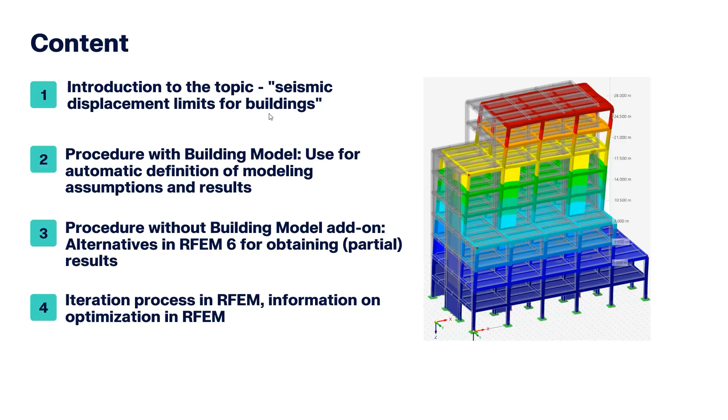Okay, so let's get started with the first topic, the introduction to the topic of seismic displacement limits for buildings. The reference for today will be Eurocode 8, design of structures for earthquake resistance. This reference applies for the whole of Europe, particularly maybe in countries like Germany or small seismicity countries it's not that relevant, but we will make here an exercise or an example in which the seismic displacement is the controlling action or the seismic action.

I just want to remark that I'm going to present here several sections from Eurocode 8, but all the requirements are not exactly what I show here. What I want to say is that this summary can be understood as a good pre-dimensioning tool, or a first iteration procedure, but further requirements and sections have to be complied with according to Eurocode 8. So it is recommended that a full review of the norm should be taken into account. As I say, this is maybe the first steps for these checks.

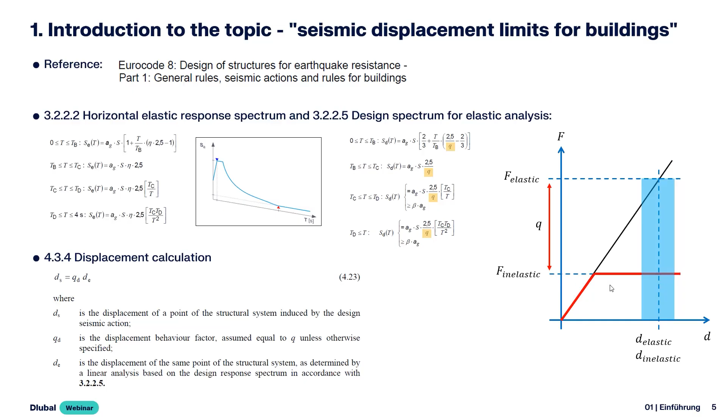Okay, so we have three limits, and the limits are for dimensioning and design of structural elements, but the description or classification of these three limits depends on the description of the non-structural elements. So it's very important to take into account from the beginning, in the prefactibility, prefeasibility, or other early stages of design, it's quite important to define what's the description of the non-structural elements.

So if we have brittle materials, we have a certain limit, and the description of ductile non-structural elements might be really important for the construction site, and maybe the costs of these non-structural elements according to B or C might be too high, and we have to switch to approach A.

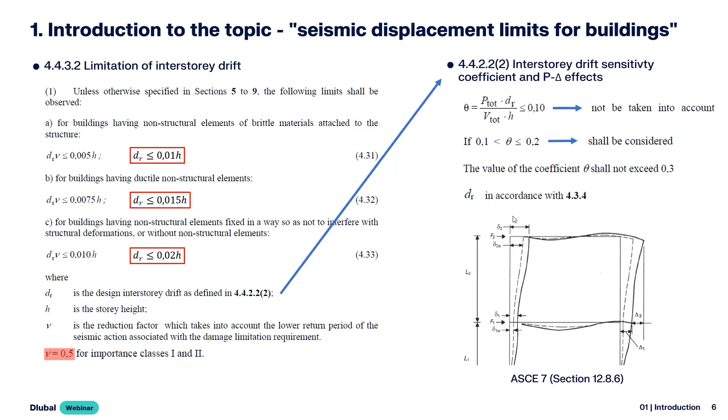So, okay, let's start on the second chapter of today: the procedure with building model. So I have 4 steps and then a couple of sub-steps. I'm gonna once again present here several sections from the norm, and after that I'm gonna jump into the model.

Yeah, so let's check out 2 important sections. The first one, the first step, modal analysis. So based on an available model, we will define a modal analysis, and after that a response spectrum analysis. But for this, we want to take into account the stiffness according to section 4.3.1 and subsection 7.

Yeah, and that's why I started with this figure in the introduction. So this section recommends that the stiffness when the cracking takes place should be taken into account. This cracking takes place in the inelastic response. So if we say at the red line, it's gonna be the actual response of the building. At this point we expect some reduction in stiffness, and the recommended value is half of the corresponding stiffness of the uncracked element, for both shear and flexural stiffness.

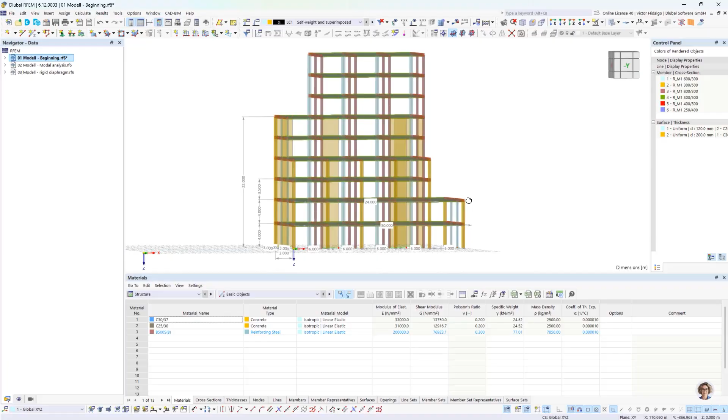No, so this is also very abstract. I'm gonna show a very simple example in the program, and let's take a look at these 2 sections in the program. So I'm gonna start with a description of the building. So we have a very irregular building here. We have jumps in the geometry of the stories, and I did this on purpose to illustrate the concept of irregularities.

Just as a quick description, we have here a reinforced concrete building with walls, and one can say very stiff walls. I'm gonna show them here with visibilities. In the navigator views, we have some predefined visibilities which help us with the inspection of the model or visualization.

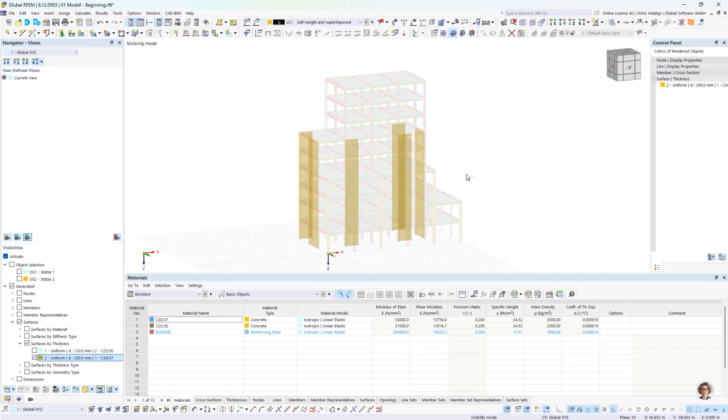So we can see here 6 walls which are conceived to limit the lateral displacement of the structure, so exactly this interstory drift.

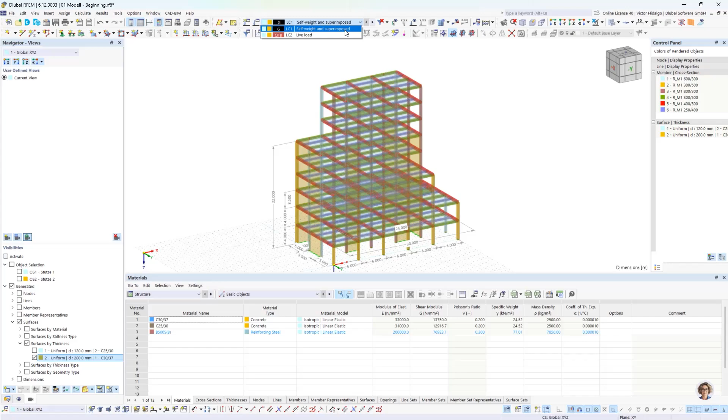Okay, I'm going to cancel the visibility. I come back to the original view, and I am going to show the loads definition. So I have 2 load cases, self-weight and superimposed, and line load. In this case, I have a very general definition, quite simple for today's exercise.

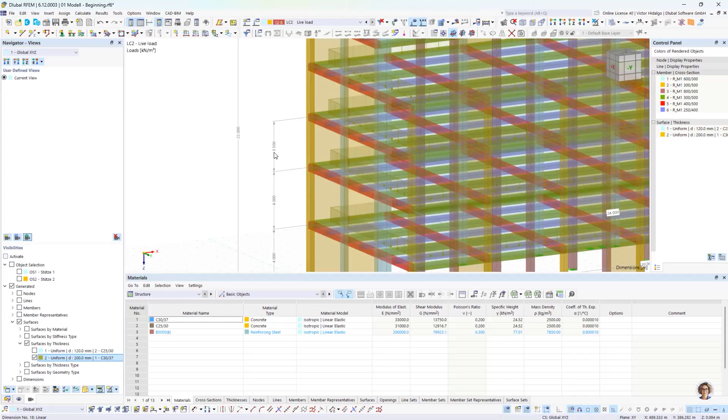Yeah, of course, so that's our base model. Also, just to say, the first 2 stories have a height of 4 meters, and after that we have 3.5. So this is going to be important when activating the building model.

Okay, so we have this general overview, and now we want to define our modal analysis. For this, we will go to the button Edit Model Base Data, and here we can activate the desired type of analysis. In our case today, dynamic analysis. If I click on response spectrum analysis, modal analysis will be automatically activated.

And according to what I want to calculate, I can select other add-ons. In this case, it's just of interest, this dynamic analysis. Take into account that when we activate something here, we might need to provide a norm or a design standard for the corresponding new feature in the program. So in this case, I'm going to leave Eurocode.

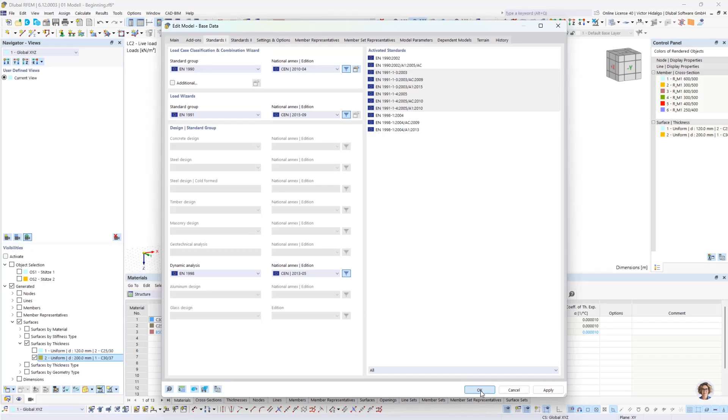Now I can go to edit active load case. In this menu, I can create a new load case of type modal analysis. I'm going to call it modal analysis 1, and this is going to be Basis.

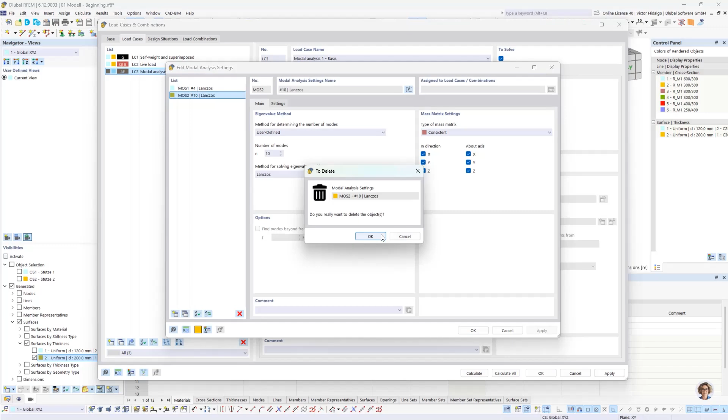I'm going to edit the settings. I erase the second, and I'm going to make here a typical definition for modal analysis to reach effective model mass factors, typical value of 90%. And then we are limited to this method for solving.

On the mass matrix settings, I'm going to choose diagonal on a classical building analysis with the 2 horizontal components and just the Z component, so the torsional component.

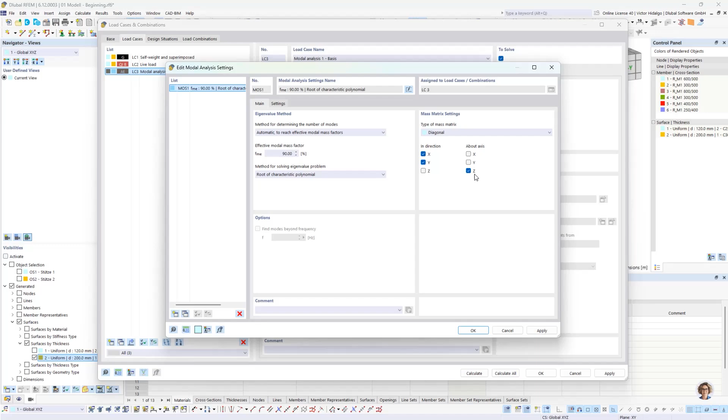Apply, OK. And then we have to select a proper import masses only from load case, load combination. So each code defines the kind of combination of vertical loads that has to be selected here.

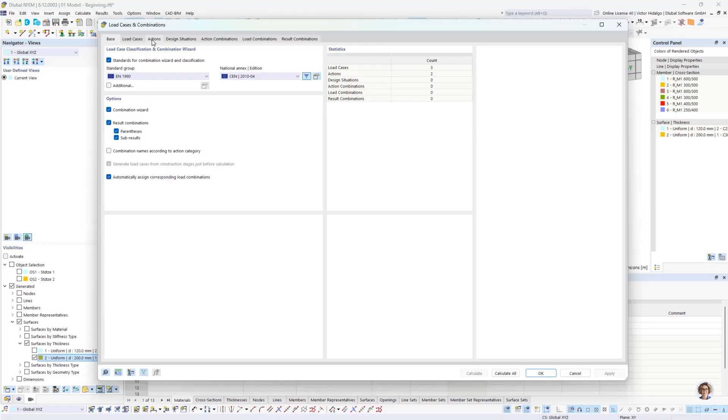I'm going to show how to do this from scratch. So this means here in base, in the tab base, we can activate our combination wizard and assistant. And with this, we can automatically generate combinations according to the norm, the selected norm, in this case, Eurocode.

In design situations is the basic definition, and we select here, for example, seismic mass combination. With this, we will get subsequently here in load combination the corresponding factors and multiplication according to the desired design situation.

Here in assignment, we see a factor of 1 for self-weight and superimposed, and live load with 0.3. So that's according to the norm. So that's quite useful in our program.

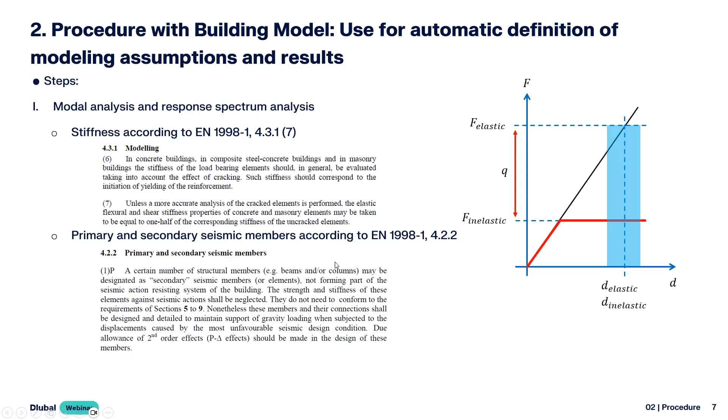So after this, I can define a second modal analysis, and we are going to do the following thing. So this is going to be the basis. In this case, we are not considering any of these two sections. Then we will make a second iteration with just the 4.3.1, and then a third iteration with these two sections. Yeah, okay, let's do that.

So I'm going to copy this one. Okay, and after copying, I'm going to change the name to 2. I erase this here, and I prepare in advance a structure modification. This is quite a very useful tool in our program, and it's very useful in this case. So I have 2 definitions.

I'm going to show them. So here you can activate what you want to have, in this case members and surfaces. And for members, I made the following definition. So according to the section in the norm, there is a reduction of 50% on the shear and bending stiffness. Okay, and I selected practically all elements.

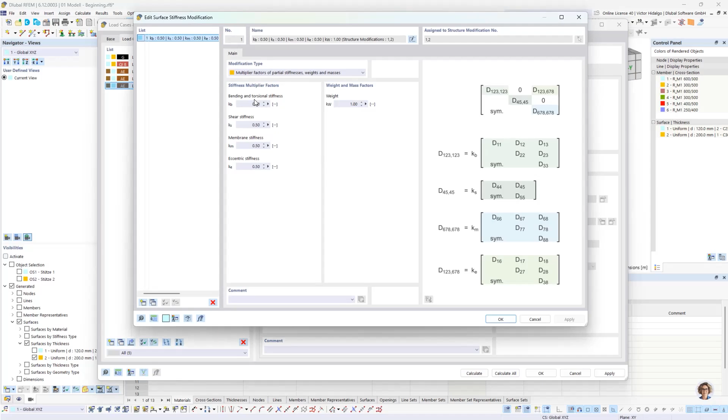The first definition inside the structure modification remains the same, and in the second definition I try to take into account this section. What I did here is make a strong axis definition of stiffness in the members - this is the bending stiffness. I'm ignoring the bending stiffness around the strong axis for certain elements.

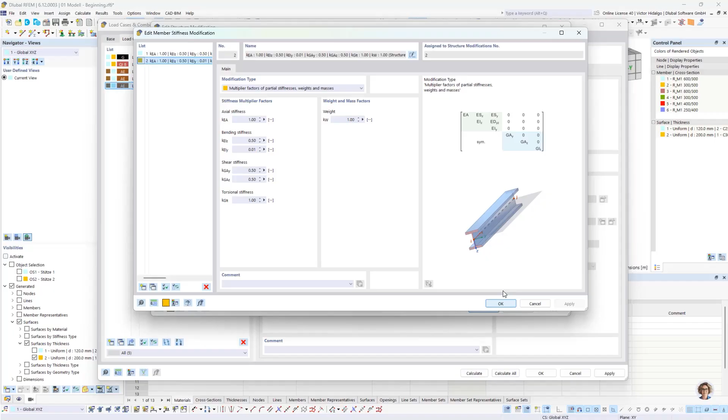Which elements? These are what we can call secondary beams, or just gravity beams. I'm going to show in the program what's the effect of not considering these elements that do not belong to the main earthquake resisting system, or lateral force resisting system.

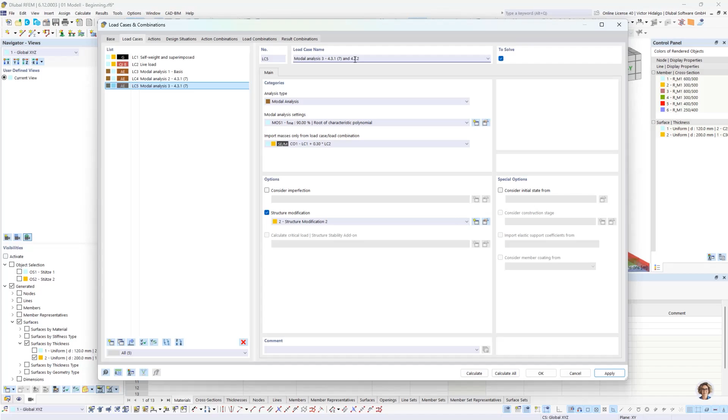And here I can write the second paragraph. So we accept this and we can run the modal analysis. It takes around 30-40 seconds for each modal analysis, so I already did it for today's presentation.

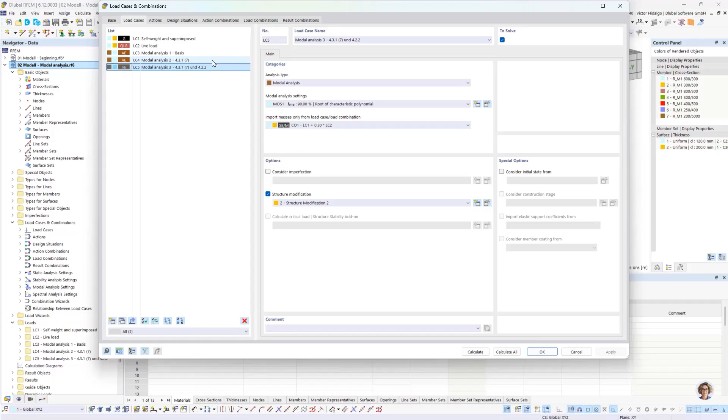I'm going to show that the definition is exactly as we did before. We're going to take a look at the modal analysis results. Here on the table we can go to modal analysis, natural frequencies, and we see for our iteration number 1, a natural period of 0.92 and 0.76.

If I change to the second iteration, so the stiffness reduction, we will see a huge change in the structure - from 0.92 to 1.24. It's a quite big difference, and it's very important to always keep in mind this requirement about stiffness.

It's a typical or classical assumption in earthquake analysis, and here we can see how different this is. This is quite a different approach in comparison to design used for vertical load - we don't do this normally in the vertical load case.

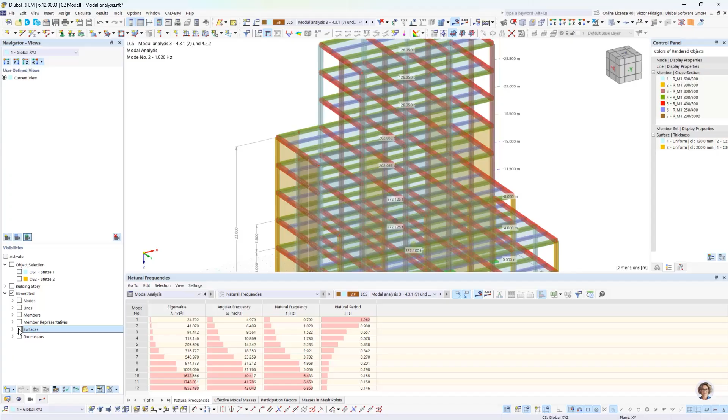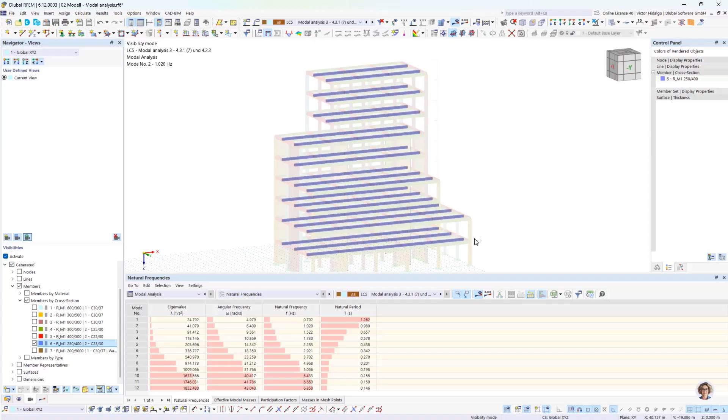Modal analysis number 3: here we have the consideration of the secondary elements, or the non-consideration of secondary elements. In this case we add the secondary beams - I'm going to show them here, members, cross section. I'm saying that all these secondary beams will not have flexural stiffness around the strong axis, in order to avoid their participation in the lateral stiffness, as we expect these contributions shouldn't be that big.

They don't connect to any column - we don't have any frame system there, so we can see that the result remains almost the same, just a small change in the decimal places.

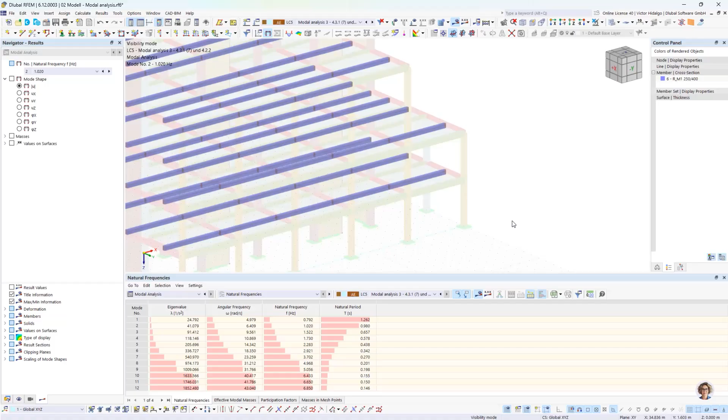After this, I'm going to work with load case 5 - this is going to be our reference. Just to show you how you can inspect modal analysis results: a quite important table here is effective modal mass. You can see here, for example, if you want to display the deformed shape of a particular mode, you can select what you want to display in this drop-down menu, and also the factor for effective modal mass.

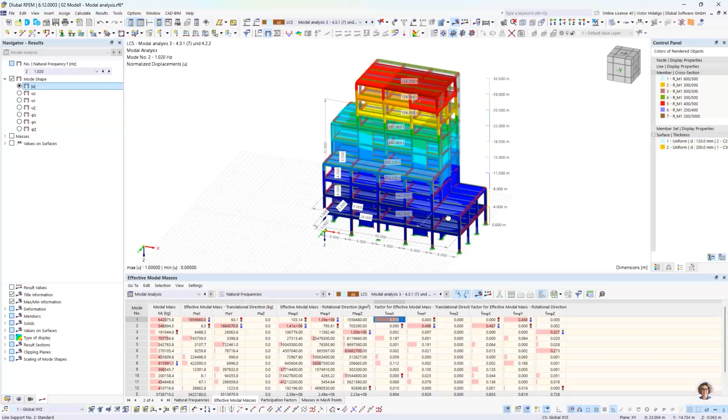I selected this geometry to show a very particular effect when we have irregularities and also a very stiff element such as walls, or so-called shear walls, with frames. This interaction plus the irregularities creates this particular condition where the fundamental mode has a participation of around 50%, which is quite low or relatively low. We're used to seeing maybe 70 or 80%, but with particular conditions in geometry, we can see that the higher order modes are quite important in the response of our building.

Just wanted to show this. So now I want to define a response spectrum, according to the content in the presentation.

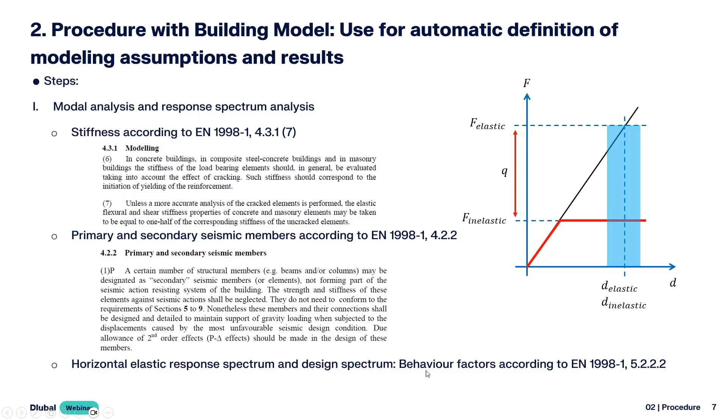After doing this modal analysis and this stiffness and primary and secondary definition, we can make the definition of the horizontal elastic response spectrum and design spectrum. Here it's important to make a definition of the behavior factor, which is defined or specified in section 5.2.2.2 - I recommend a full review of this section.

In this case, for our concrete structure, I made a definition. How this works is that according to the location and according to the norm for a particular country, it is defined which ductility class or which kind of requirements I have to fulfill for this particular place. For example, in Italy, high seismicity, I have to select a structure that fulfills particular requirements - this is provided by the norm.

Because of time I cannot make a full explanation on this, but let's assume that according to the location of this building, I have to use ductility of middle class type. Based on the description of our system, we have a dual system, coupled wall system, and this is the base definition for our behavior factor.

As we see in the title, it's for systems that are regular in elevation. So I can calculate the basic value of the behavior factor, and after that I have to check for irregularities. In this case, the building is irregular.

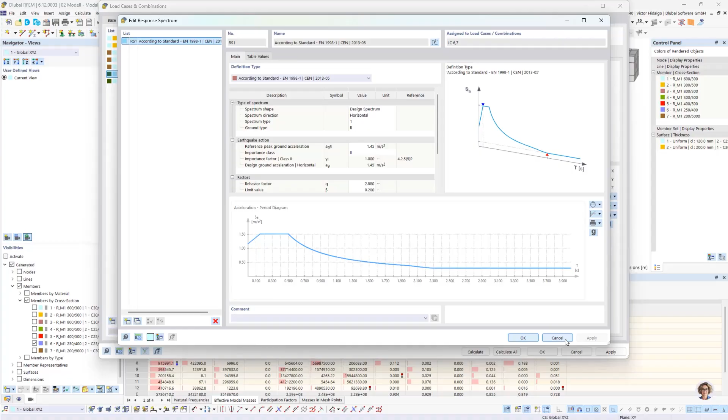Important here also is to create a second response spectrum, and as we saw, if we use a response spectrum of type design spectrum, we have to multiply the results for displacement. So in this case I'm gonna do this in a particular way here, but there are many ways of doing this.

What I'm gonna do is create a second analysis, and if I multiply again by a behavior factor Q, then I get this. I'm gonna use here this scale factor definition. So if I multiply again by the behavior factor, I'm gonna get the correct results for displacement.

Okay, I accept this, and now I can run my response spectrum analysis. I'm gonna jump into the presentation once again. Now we can make the activation of the building model add-on.

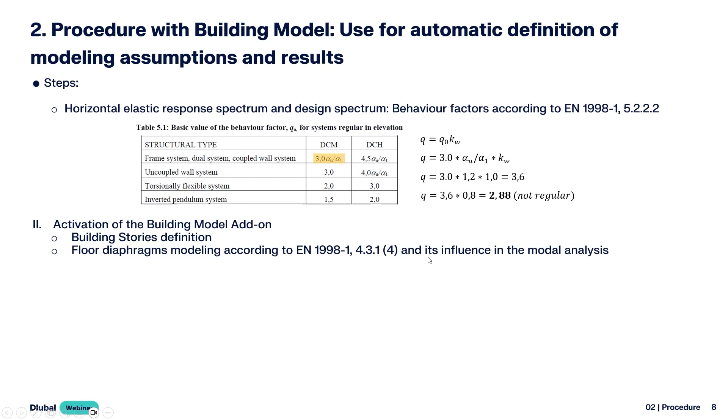Before running our response spectrum analysis, I'm gonna make the building stories definition and the floor diaphragms modeling according to section 4.3.1, and I want to show the influence of this in the modal analysis.

This floor diaphragm modeling makes reference to a very famous assumption in seismic design or seismic analysis, the so-called rigid diaphragms. I want to say that it is not a better or a worse definition. It's difficult to make a general rule, whether we have to use this in our case or not.

There is no clear physical condition or clear rule for where this assumption can be implemented in the model, but as a general rule, this is a very engineering concept and interpretation, whether we are allowed to use this or whether we should use it.

I make just reference, but as I say, if you are in a case in which you might want to implement this, my recommendation is to run a couple of iterations, as I'm gonna do right now, and try to have a feeling about the results, and try to make an interpretation of whether it is appropriate to consider this or not, and what are the effects of this, because it's typical to do it, so let's do it.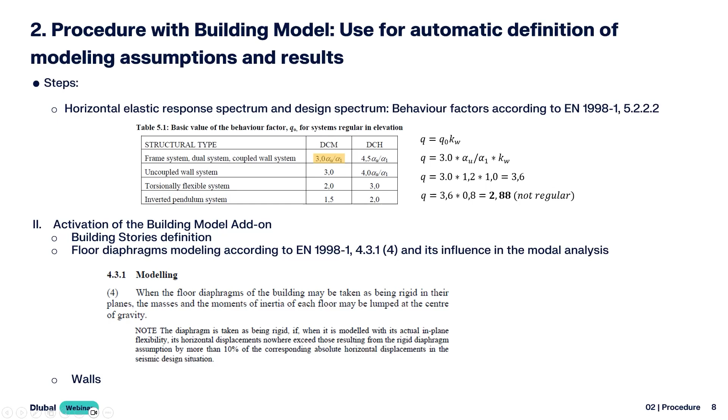Also here in the activation of the building model add-on, we can define walls. I'm gonna activate this. Once again, here, edit model base data. And okay, there was already a definition.

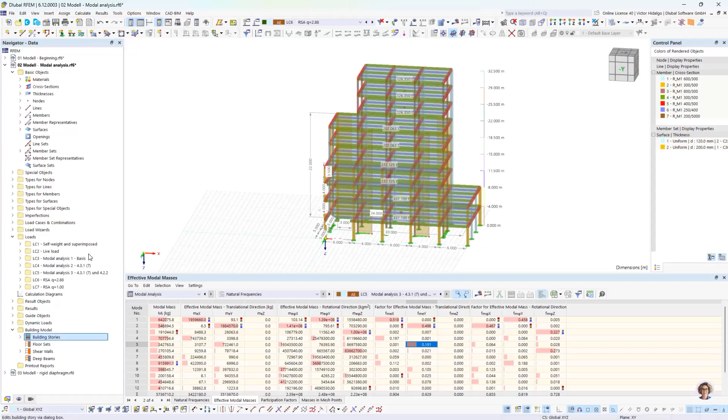Okay, so building model. When I activate this, I get here this object or folder, and I can edit the definition. I had here a predefinition with two different stories, but I'm going to erase this in order to display how it works.

So in this case, I erase the building model, and I'm going to generate building stories from scratch. Then I go to edit, and the program automatically recognizes the different floors, or planes of the horizontal elements. With this automatic definition, we can save time defining the stories, and it's quite useful to have this menu.

Now we can make global adjustments. In this case, I'm going to leave this as is for the floor diaphragms. I'm going to consider no assumption in the stiffness, so I'll leave original stiffness. I have a second model with the rigid diaphragm, and we can see a basic difference between these two approaches.

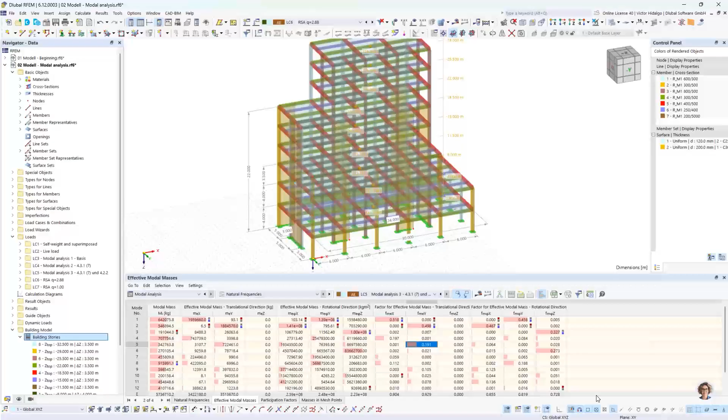Okay, I'm going to run this response spectrum analysis. It takes not that much time, since the modal analysis is already available. Here we can see the progress bar and an estimation of the remaining time.

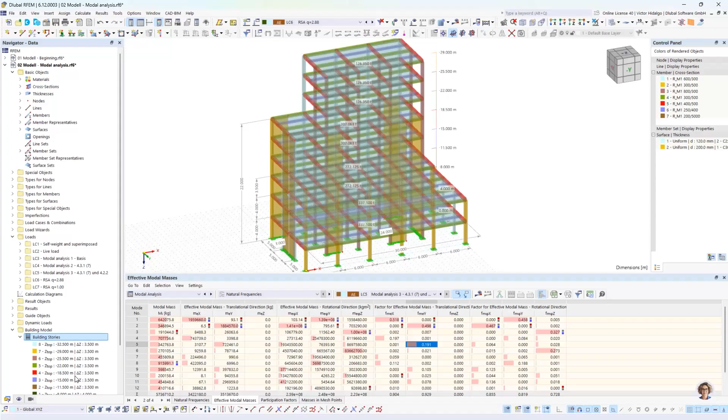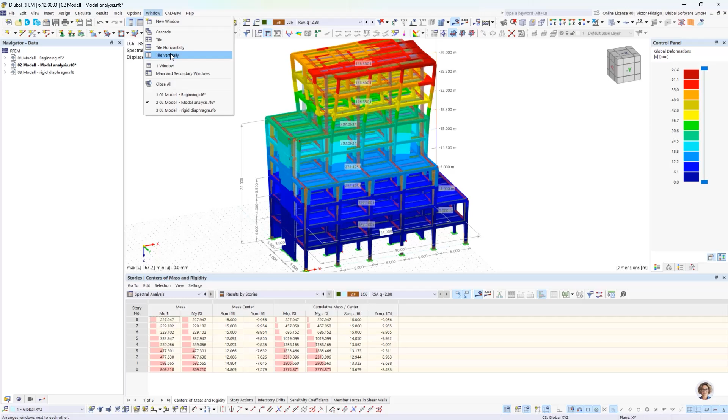Here I have the same model so far, but with a model definition of rigid diaphragm. I want to show this for comparison purposes, so I'm going to use window, tile vertically, and then close our first model.

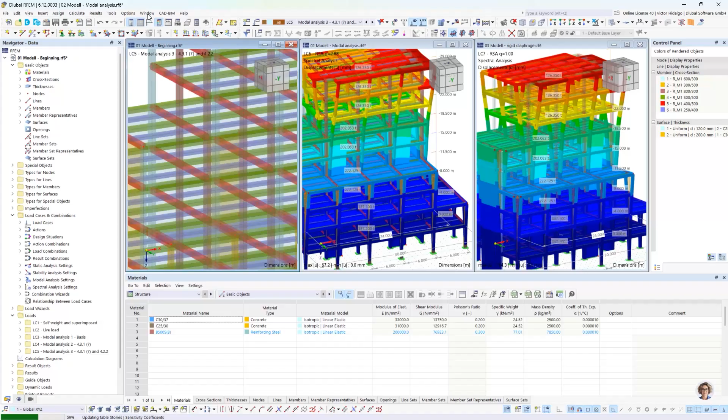Once again, I'm going to go here, tile vertically. So we have on the left the results for the model without rigid diaphragm. In this case I want to display once again the results for modal analysis, using the result for masses.

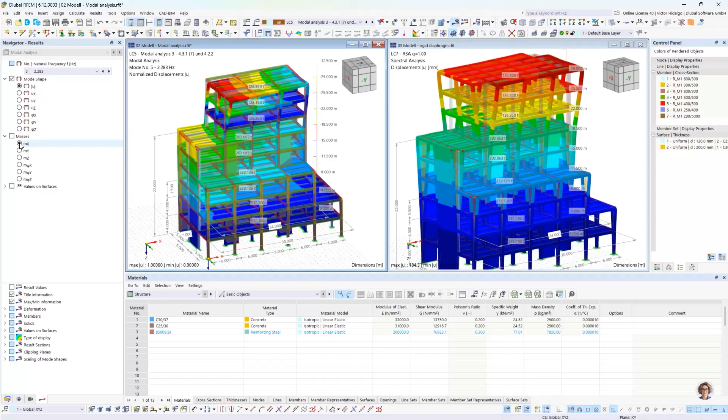What we see here is that according to the mesh settings in the program, with this basic definition we have a mass definition on each point of this mesh. This is quite a complex mass matrix definition. If we activate the option of rigid diaphragm, I'll show that we get a very simplified description of the mass matrix.

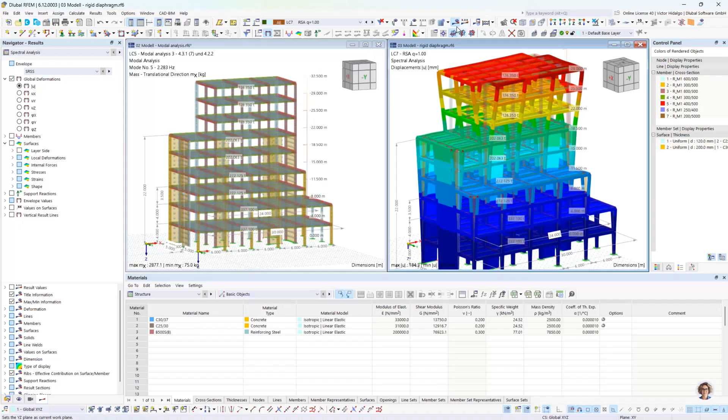So in the first place I want to show you the definition in the building model add-on. In this case I have the same definition, but I selected all stories and created the rigid diaphragm, floor diaphragm as rigid.

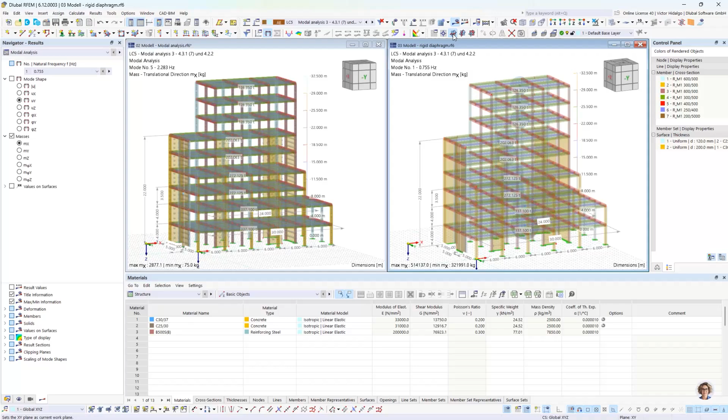I already ran the analysis just to save time, and in the same way I'm going to look for the results of the modal analysis, iteration number 3. Once again the masses definition, and we see a huge difference. Now in this case we have what we call lumped mass definition on the center of the element, or of the floor. This helps a lot in the analysis time for this model.

Once again, it's important to keep in mind that this has to be analyzed, whether it's better the option on the right or on the left. There is no general rule for this.

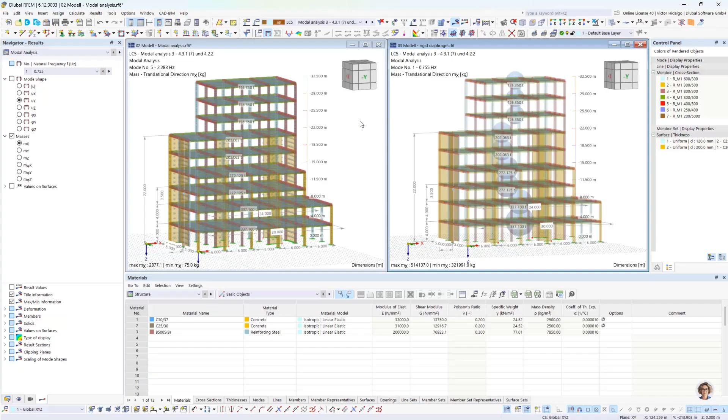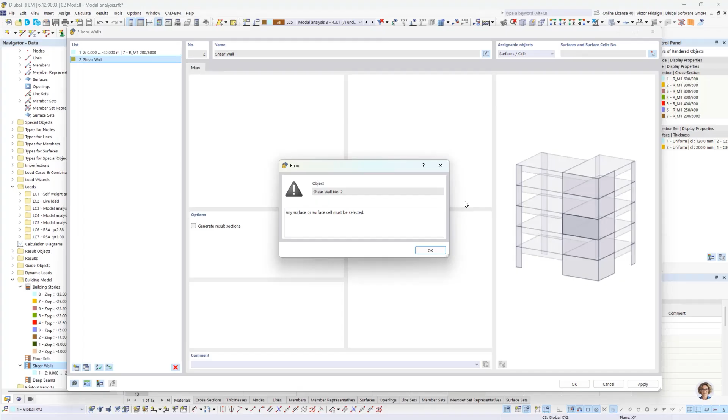Okay, I'm going to jump on the model on the left and show something: the walls definition. So I'm going to make a new shear wall definition. There is already one, and this is quite versatile because I only have to select the surfaces and the program is going to recognize the geometry of the wall.

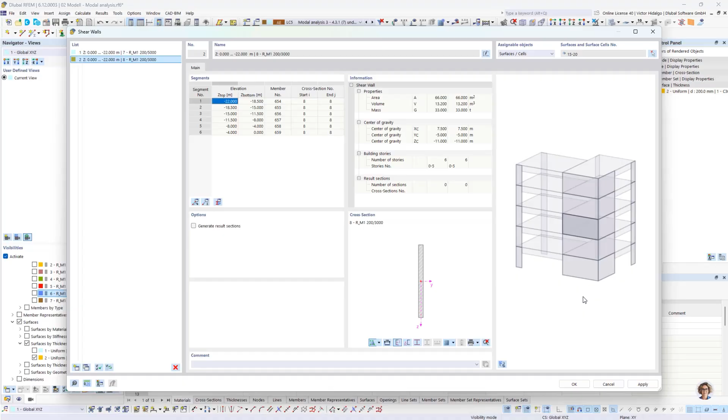So I select simply all the surfaces, and the program recognizes the cross-section dimensions and also the floor definition. With this I can integrate the results for the areas, because for design we need the results in the form of a member. Exactly. So this is quite versatile and useful for a quick definition.

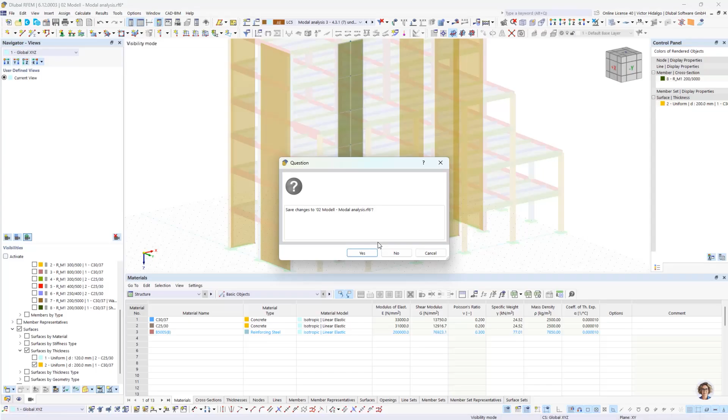I have to delete results after creating a wall, and we see here an internal element that's going to integrate the results for all these areas. At this point I'm going to close this model, and I'm going to stay in the rigid diaphragm model for the last part of this section.

Okay, I come back here. We activated our building model add-on, and now we have to check the requirements for the limitation of interstory drift. According to the floor definition, I made here the multiplication, and our limit is going to be 35 millimeters. I'm going to select brittle materials for non-structural elements, and first I have to check the requirement of P-delta effects.

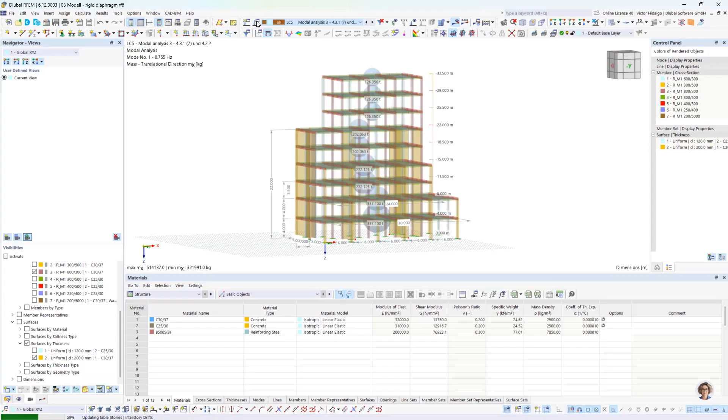Okay, and finally we can deliver the results for design. So here, important: if we are going to check displacement results, remember we have to use the multiplied displacement from the response spectrum. So in this case, once again, I have to use the response spectrum analysis definition with the scale factor.

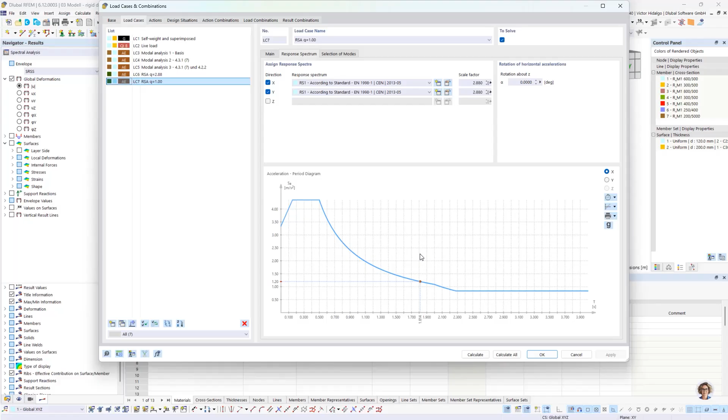Quite important since the beginning of today's presentation. Okay, I'm going to run this analysis. Oh, sorry, yeah.

So, it's already there, the analysis, and in this case with the spectral analysis and the building model, we have an additional table of results, and this is what we are going to inspect right now.

This is the entry for results by stories. In results by story, we have this group of tables with quite important quantities of centers of mass and rigidity. The calculation of center of rigidity is quite particular - we have to take into account the shear walls and the particular stiffness of each column. This is a very good result or summary for our structure.

In story actions, we have the summary of story forces, its delta, and the location of resultant story forces. So for checks of stiffness irregularity, if it's required, this table provides the base information for it. Quite useful also. And here we come to the important topic for today, interstory drifts.

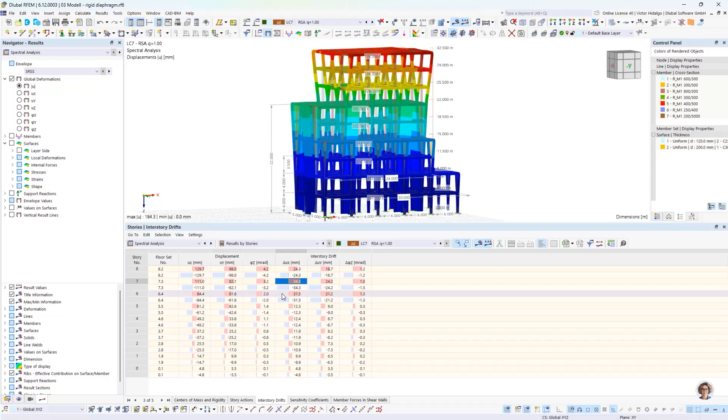I made several iterations to, in the cheapest way or with the smaller sections, achieve this value. So, and of course, this is the objective of the design now - the most economical way to fulfill the requirement.

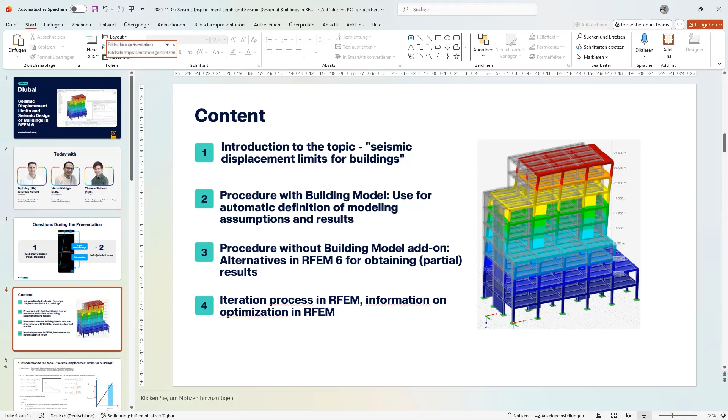So this part is done, and after this we can see how we provide the design add-ons with the information for design. In this case, I already did it, so we can activate the concrete design add-on.

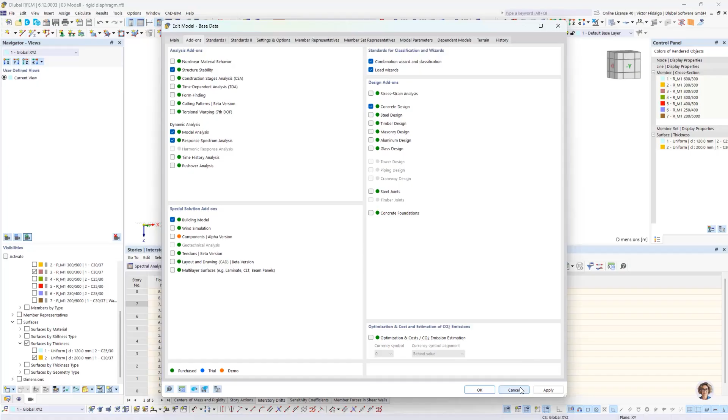And in accordance to this, we can create an additional design situation. In this case, seismic, or in this case, permanent and transient. Important is that when we have seismic and we want to consider response spectrum results or response spectrum analysis results...

...we have to use a result combination. Otherwise, we cannot consider these results. So in result combination, we get 2 because we have 2 response spectrum analyses.

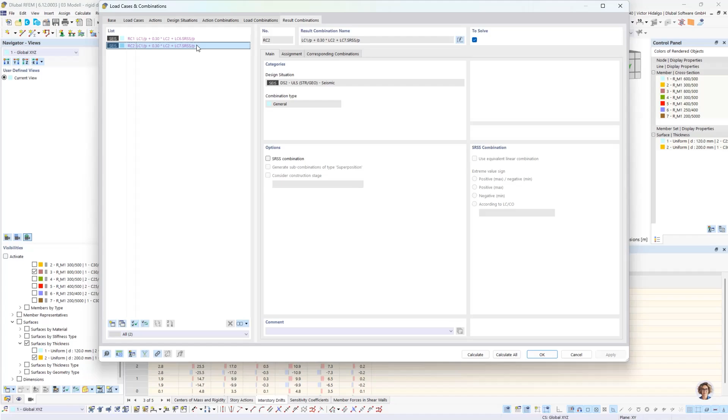And after this, I can go to the table design or concrete design and make the definition. I'm going to make here the input data, so we can select what we want to do.

Here, very important - just we have separate webinars for this, but here I just want to mention that in concrete design add-on settings, you select the seismic configuration. This is not by default available, okay? And as I said, you can make a complete definition here.

In this case, I can check the results in general. So in this case, there are some seismicity checks that are not considered, that are not fulfilled, and I just want to say there that in the input data and design situations, I selected the result combination 1 and 2, but the second is considering the multiplied response spectrum.

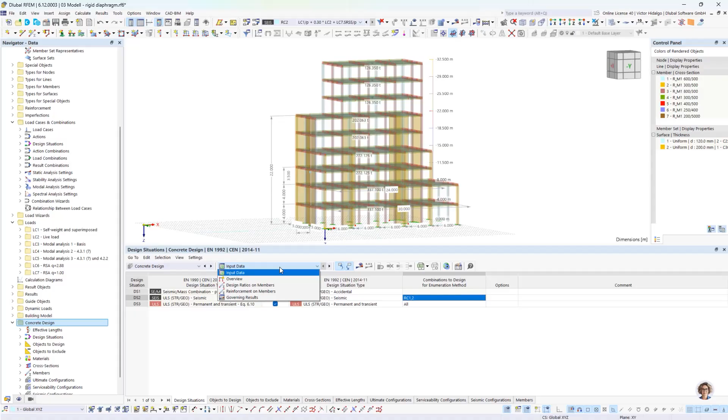So in this case, I made this on purpose because this cannot be used for design now. In this case, the definition should be like this - we have to ignore this, this is just for displacement. And this is the reason why we have some design ratios that are bigger than 1.

Okay, very quickly, I'm going to show now what we can do here in the next chapter, and this is quite summarized. So the procedure without the building model add-on - we can do very few things without the building model add-on. So the first part we can do, and basically all the features that we saw here, we cannot do.

This means that we have to do a very manual procedure. So for example, exporting to Excel and then making calculation by hand, I mean in a software, but manually making all the definitions. So the only quantity that can be generated without the building model add-on are the story forces.

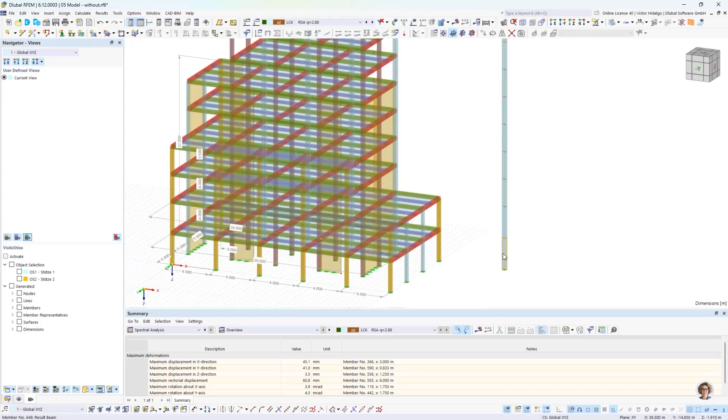And for this you have to make the following - so I created a result beam. This result beam has no influence on the stiffness or of the building or of the structure, so it's going to be ignored, and it works as an integration element.

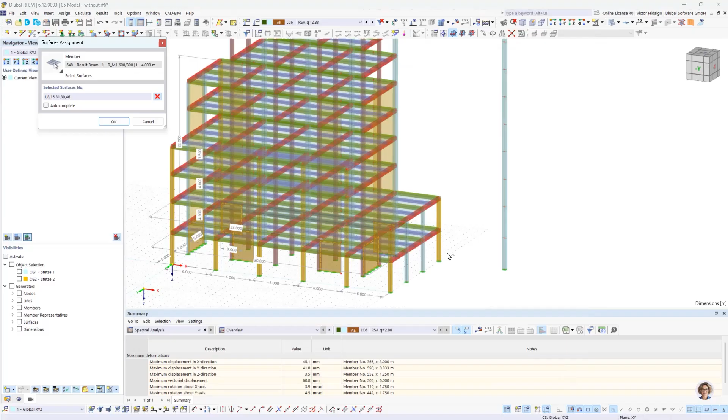So I selected here integrate stresses and forces from listed objects. And on each floor I selected the walls - in the first floor, all the walls for the first floor - and then all members, or in this case all columns, for the first floor.

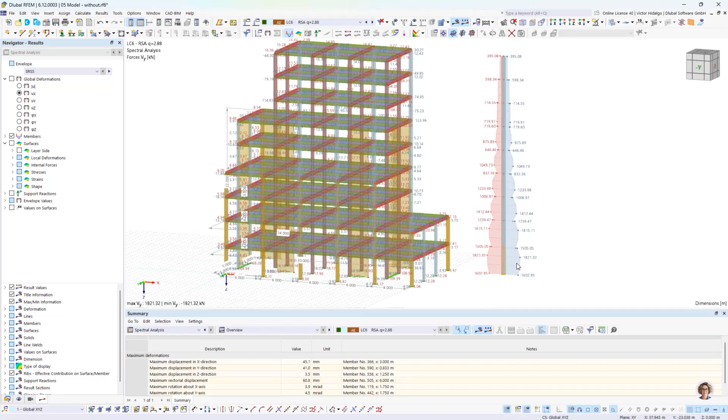And by doing this I can integrate the results on each floor, for each result member. Okay, I'm going to isolate this just to have a clearer view.

What we see is that, for example, here in the first floor we can recreate the 1602. We see here that it's the same value now. This is bottom, and then top is the 1505. Okay, it is the same result. So if I change here internal forces direction and the other direction, I get exactly the same values.

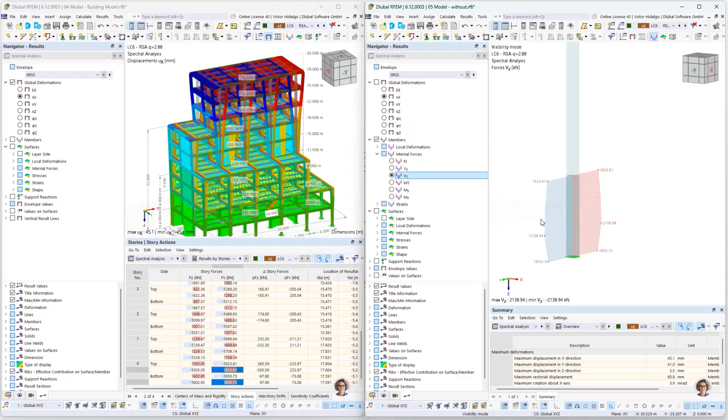So I say this is the only result that we can reproduce. As a summary, all these other values we cannot automatically get results from RFEM. So we have to either export to table or make a manual definition of it. That's why the building model add-on is quite useful.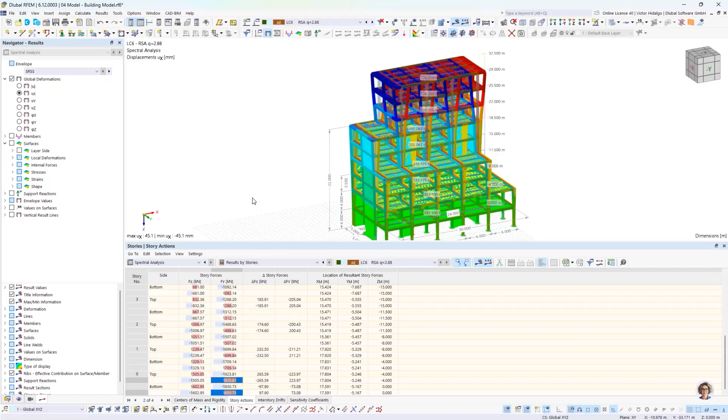And well, design can be done as I previously showed. Use here the final remark. As a general conclusion, our hint for the optimization process and iteration process: for the modal analysis, we have to make maybe 1, 2, 3 iterations to have a sense of the results, also integrated with the assumption in the building model add-on.

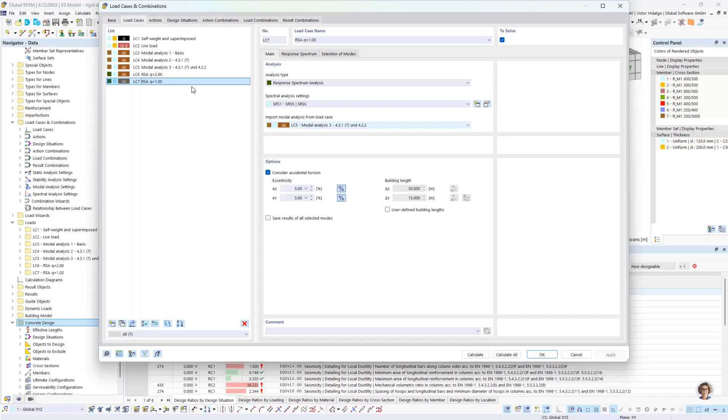And also, for example, the results for the response spectrum, as we have an example here. After this we have to make a design, and if we do not fulfill something here, we have to go back to change probably dimensions in the elements and carry out the whole design again. If I make a change in the dimension of this column, then I have to go back and run again the modal analysis and the response spectrum analysis, and perform once again the design.

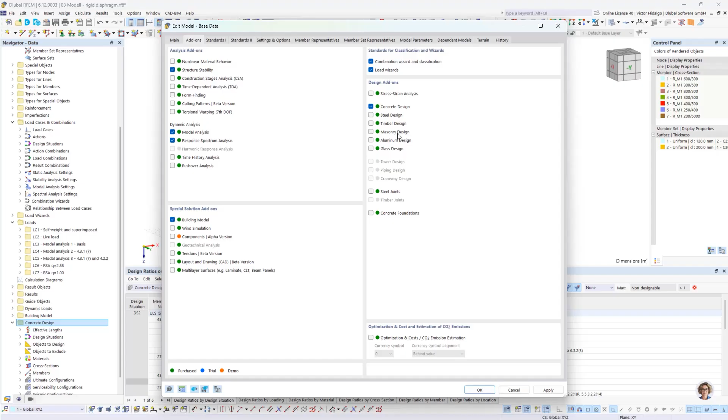So for this iteration process, very intrinsic from seismic design and seismic analysis given this condition, our program offers a very versatile and useful approach with our design add-ons. Our philosophy is all in one: you can apply by activating and selecting what you need. In this case, we made use of 4 add-ons, and you don't need an additional application for this. That's why RFEM is very useful. That's the final conclusion on this topic.

Drift limits, or interstory drift limits. In this case, I give back to Andreas, so thank you for your attention. Andreas, you can take the presentation or retake the presentation.

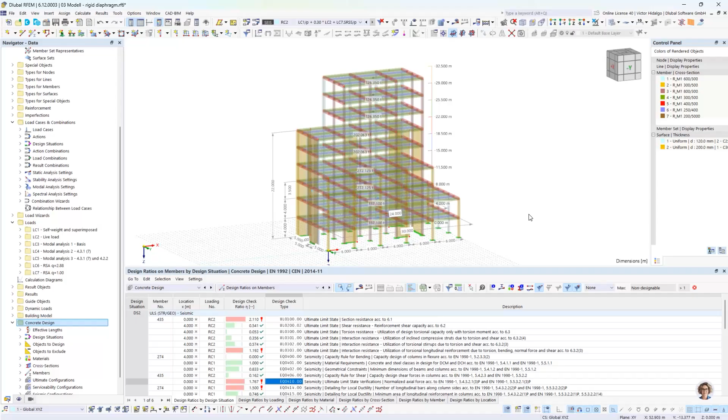Thank you, Victor, for your nice presentation. At the end, I have an additional hint for you about our online courses.